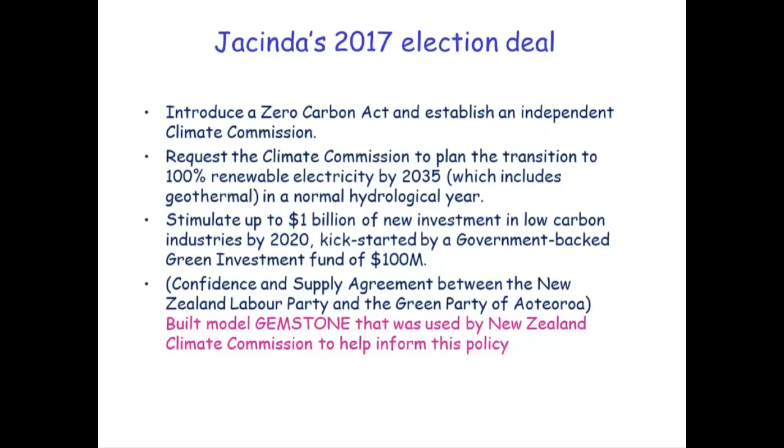This model was used by the New Zealand Climate Commission, which was created to help inform policy. I'd like to tell you briefly three things that come out of that discussion and use of the model. The first is that policies really do matter. If you look at these figures, all of the figures I'll produce today go on the bottom axis, from 0 or business as usual over to very aggressive reductions.

The policies for those reductions could be a reduction in CO2 emissions, shown as green bars in these figures on the left, or they could be a different policy about closing down plants, shown as blue lines. As you can see, the green figures show our model worked: if we pursued the policy of reducing CO2 emissions, we could do that, and the green figures actually decrease down towards 0, whereas the cost increases as you do these things.

However, if you change the policy to just say we're going to shut down non-renewable plants, then because of the definitions that economists, policymakers, and politicians make, the net effects on CO2 reductions are less than idealized compared to the CO2 reduction policy.

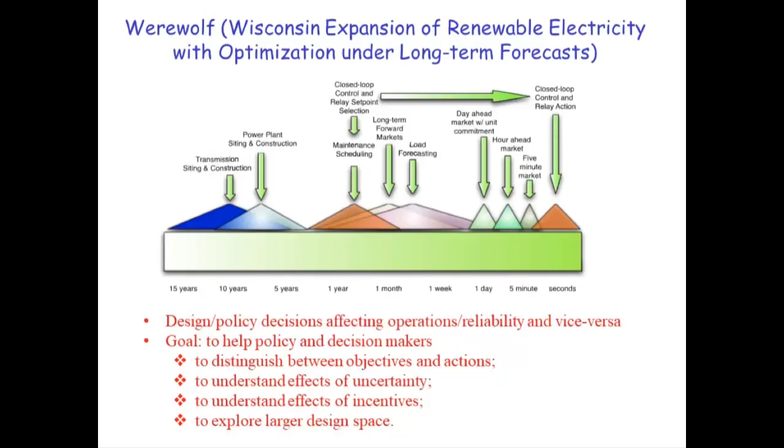We have to worry about a whole bunch of different futures and uncertainties to explore. Our model enables us to explore a much larger design space than normal operational models, which typically just tell you what the investments are at particular stages. Our model enables us to do much more than that.

Renewable energy makes those uncertainties much more difficult and challenging. Not only are the uncertainties those policy or climate style uncertainties that are determined by long scale planning, prices, electricity prices, or long-term effects, but they're also affected by operational effects, both of weather and demand, and also the notion of the duck curve, which shows an increasing need for ramping at different times of day, and because of renewable electricity, a much higher need for backup capacity to ensure batteries, to ensure supply when we have random renewable generation.

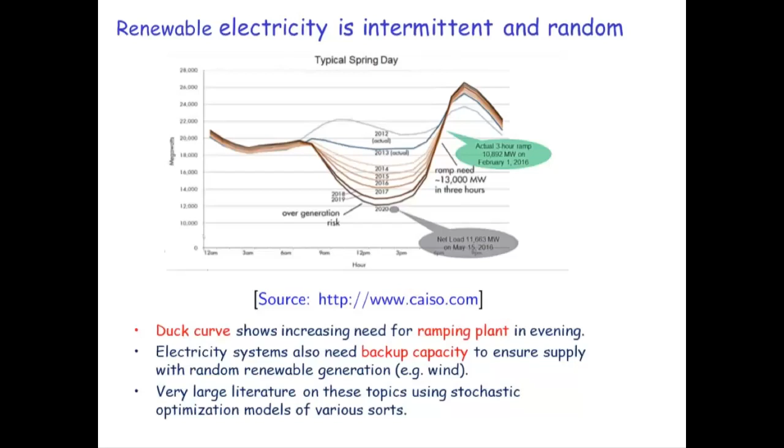In this context, what we build is a model that enables that trade-off between those long-term capacity decisions. In this simplified two-stage stochastic model, for all of the nerds amongst you, we talk about capacity decisions, which are long-term decisions, and I'm thinking of those as variable Z at cost K of Z, and those affect those short-term operating decisions, which are in this simplified model, generation Y, cost C of Y, and the effects of the uncertainties, which might require load shedding at a cost of Q, at a cost of V of Q.

What I mean by uncertainties is we have both uncertainties in terms of the types of investment that we can actually do and the development of different technologies and their capabilities. So different futures correspond to different views of those technologies, but they also encapsulate the different uncertainties which are due to demand or due to prices or even due to intermittent wind and weather effects. And so our model is this two-stage problem, which invests in capacity of type Z, of size Z, and then operates both at Y and Q.

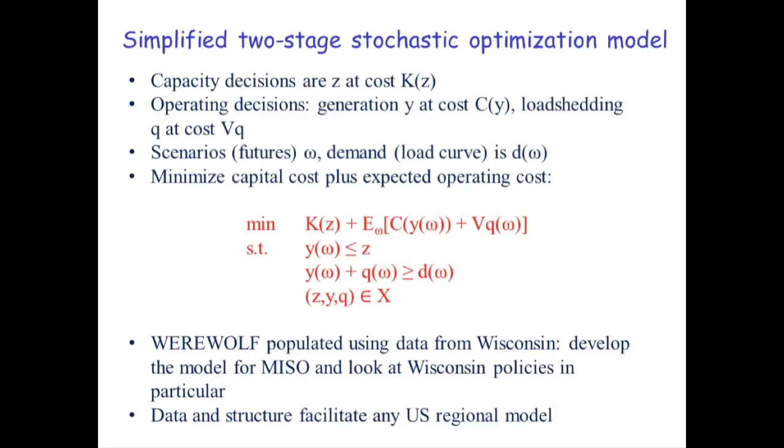The data in this model is very rich. We take data from a whole bunch of different systems, both from the EPA, from NREL, and ReEDS data, and the annual technology baseline, as well as using data from a whole bunch of census data. And so we build models, and I show you some indication of these models. The data that we generate is at the county scale in Wisconsin, but it can be formulated across any regional area across the United States.

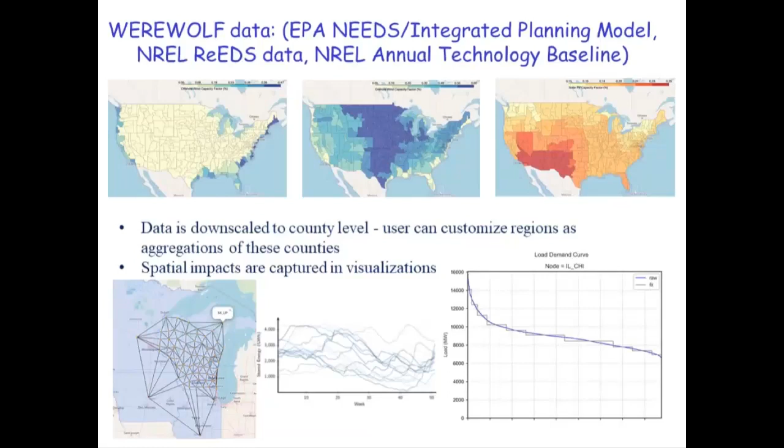I show the types of data that we have here for offshore wind, onshore wind, and solar generation. Those can then be downscaled first to county level, and then the user can customize regions within the model, such as Wisconsin, to generate aggregations of these counties to inform our models with this particular data. We actually have different types of data on transmission, shown in the bottom left here. In the middle, we have all of our different scenarios in wind or solar. And then we actually have physical constraints, which are load demand curves, which are also scenario dependent, and I give you some, but also spatially dependent. So we actually have an Illinois-Chicago load demand curve, even though the model itself is being postulated for questions within Wisconsin.

So I don't want to go into much detail, I probably don't have a lot of time anyway. But we do talk about carbon reductions, and within Wisconsin, we see a very different portfolio of technologies that are relevant for the policymakers. The policymakers can see graphs which tell you at each different level of carbon reduction, what would be the portfolio of different techniques or different installations of generation capability. And the graph on the right shows to the people making policies the effects, the shutdowns, or the reductions in usage of different generation technologies due to the imposition of a policy, which in this case is carbon reduction.

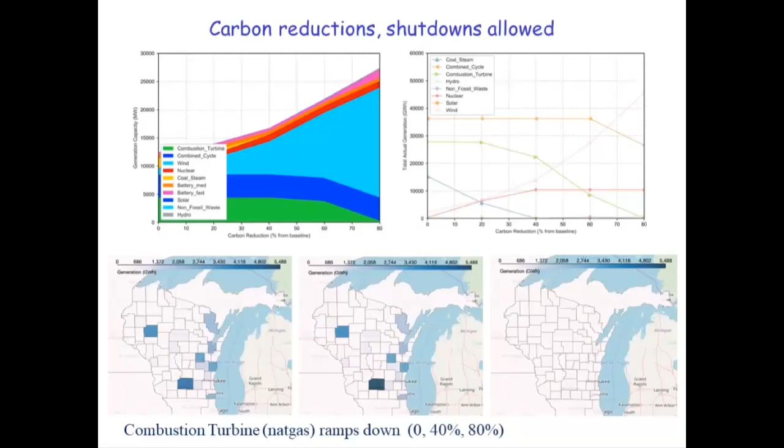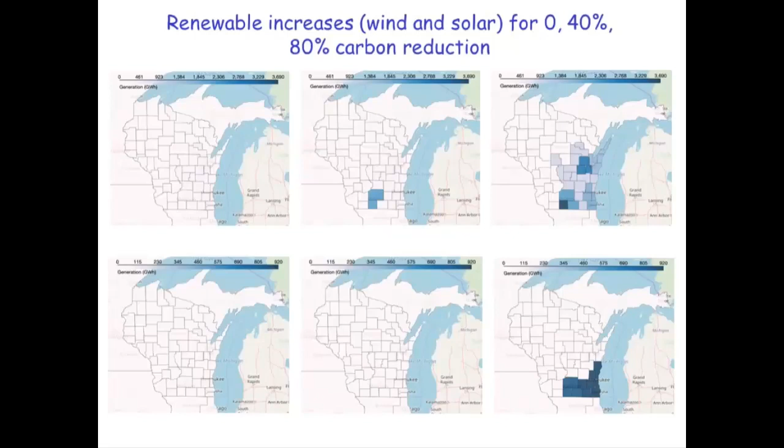I want to challenge everybody, or invite everybody here. I saw there a question, let me just finish off here, and then I'll come to the question at the end.

We presented these models to legislatures and utility owners and the Wisconsin Public Utility Institute, and tried to inform them that our models can help inform policy, and that our models show how effects and the costs of constraints will change policies, or should enable people to talk about different types of policy and how to impose or get to objectives with different techniques or different engineering aspects.

Our models couple both reliability in the operational level, via a large number of scenarios, to the investment decisions that people are making. The model is currently being refined to enable these people, both in the legislature and in utilities, both public and private within Wisconsin, to actually utilize their data, their private data, in conjunction with our models, so that everybody within the policy debate within Wisconsin is able to use the same model, but inform it with sometimes proprietary data that is only available to certain of the decision makers.

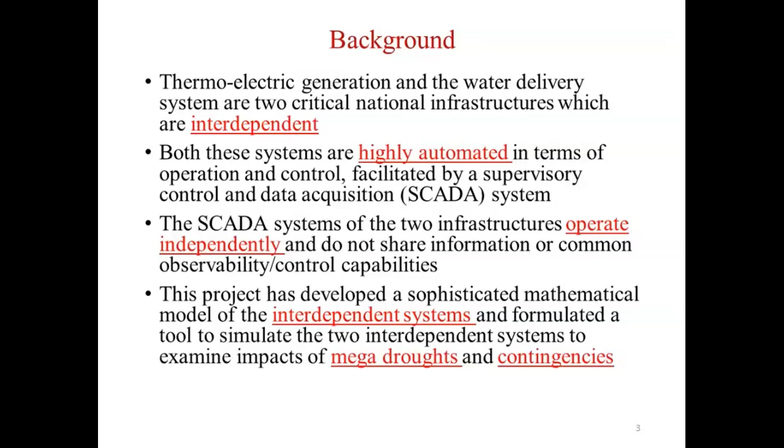So in this project, we were going to build a sophisticated model of the interdependent systems and formulate a tool to simulate the two systems, taking into account this interdependency. The idea here, in the Southwest, the primary interest was to examine the impact of mega droughts and contingencies on these two systems. So we did quite a bit of surveying of water system engineers, electric power system engineers, and talked to a number of experts in this area.

The water delivery system, for people who know about the power system, has several commonalities. There are typically large sources of water. You use a lot of pumps to actually deliver them close to large urban areas. You have some storage in these areas, and then you treat this water.

In Arizona, there is the Central Arizona Project, which is a large canal system that brings water from the Colorado River towards the primary urban areas of Phoenix and Tucson. Closer to these cities, you have a system which looks very similar to the electricity distribution system, with a series of pipes of different diameters, pumps, and storage, which supply houses with water, or agricultural farms with water in this particular case.

The major difference between the water delivery system and the electricity delivery system is storage. They have a significant amount of storage. They can store water at heads in these water towers which you see, and then use them for delivering to the system. So that's one commonality.

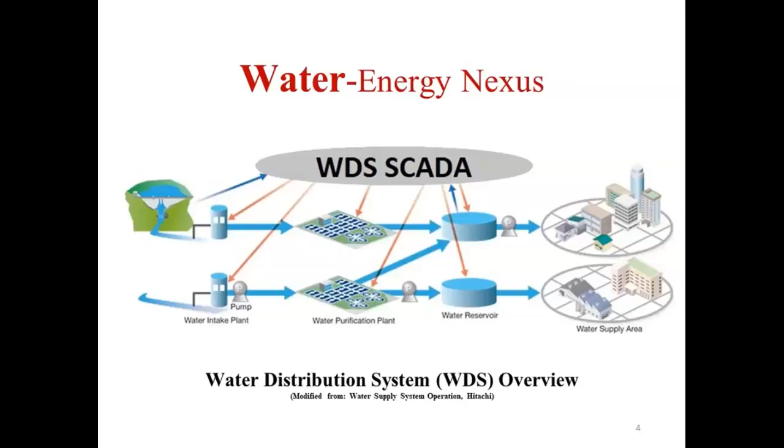The primary interdependency comes with thermoelectric generation. This is not the water supply in the boilers - that's a closed system requiring very little top-off. The primary use of water is in cooling, and when they do wet cooling using condensers, there's a spray of water on these condenser tubes, and a large part of that water actually evaporates. That's where the loss occurs.

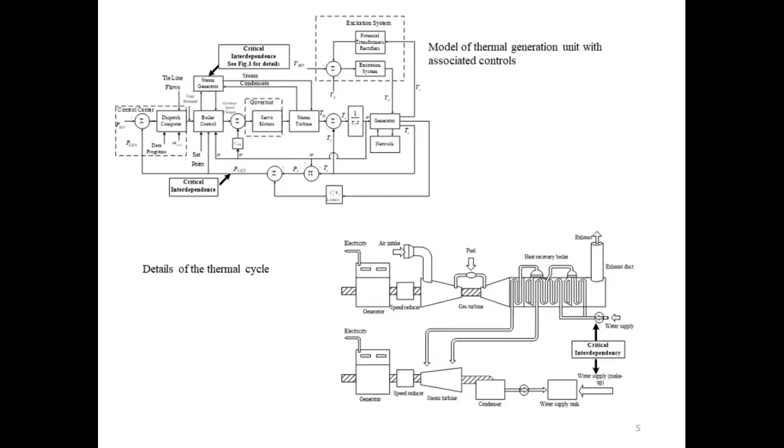There are some very fascinating numbers if you see what happens around the country. So that is one dependency with the power system.

In the water delivery system, starting from the raw source of water all the way up to delivery and treatment, they have a huge number of pumps, stirrers, and various filtration facilities which again require pumping, and they are a huge consumer of electricity.

If you look at the numbers, there are some significant shocking numbers in terms of electricity that they use. Both power plant operators and water system operators have very good knowledge of the cooling water requirement - power plant operators know exactly how much water they will use in gallons per minute for a particular level of generation. Water system planners and operators know what their pump demands will be. Just like in the electricity system we commit and schedule generators, they actually commit and schedule pumps. So there's a very similar operation taking place.

And just like we do day-ahead scheduling, they too do day-ahead scheduling. It so happens that their scheduling horizon is 1 hour, just like we have the scheduling horizon in the power system to be 1 hour. So these are all various commonalities that we see.

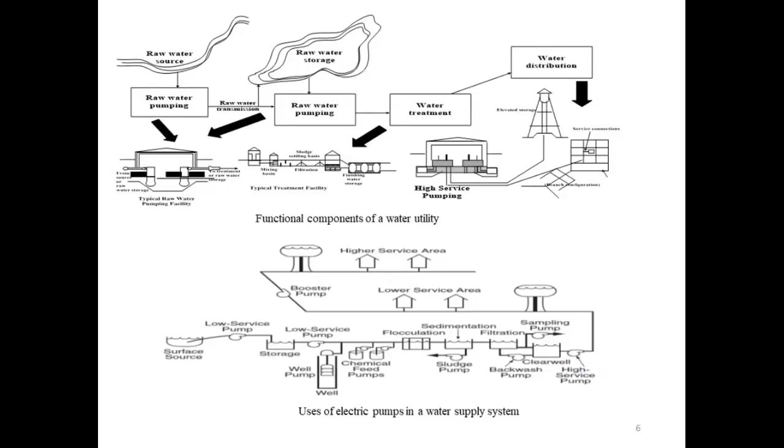Here is an idea of some things around Arizona, just as an example, but I'm sure this is common elsewhere in the country too. We have this canal system which is operated by opening and closing gates, which are electrically operated. And then we have large pumping stations, and these pumps are heavy electricity loads.

For example, this is a pumping station near Tucson. It has 6 units, delivers about 621 cubic feet per second, and has a total pump capability of about 8,100 horsepower - roughly a 6.04 megawatt load. So it's a fairly significant load, and this is where the primary interdependency with the electric delivery system comes about.

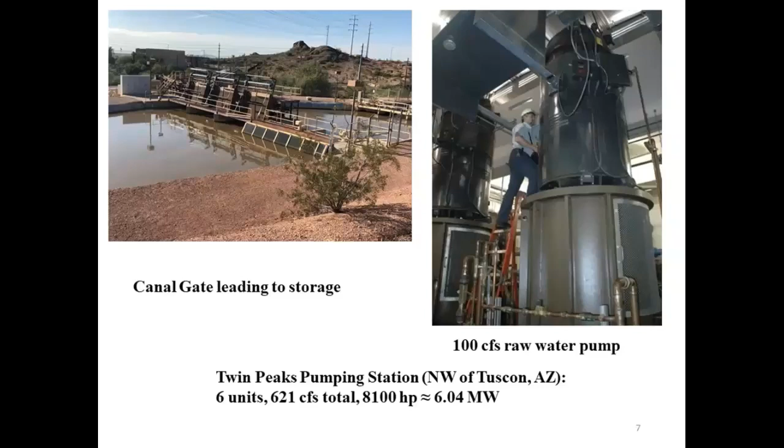If you take a state like California, which grows a large amount of fruit and vegetables for the nation, some 15% of the electricity usage in California primarily goes towards pumping needs for irrigation. That's another shocking number, because that's where you can see the big interdependency coming between these two systems.

In our survey, we saw that electric utilities keep meticulous records of cooling water usage. They know how much water is required for different types of thermal prime mover fuel types, and they have this data for different times of the year and different times of the day. They calculate this in terms of an average cooling water requirement rate in gallons per megawatt hour.

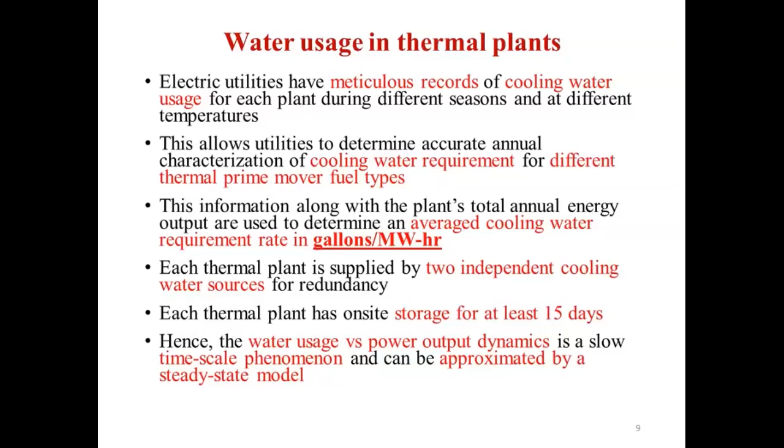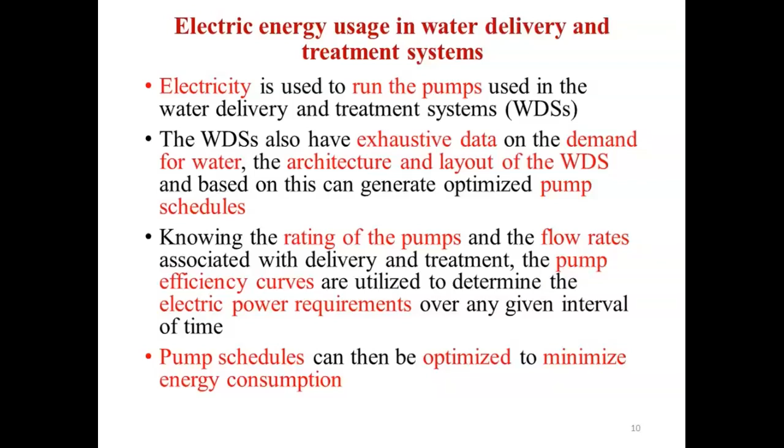The water system again uses electricity to run pumps, and they too have exhaustive data on the demand for water, the architecture and layout of their water delivery system, and they use this to generate optimized pump schedules. They know the rating of these pumps, the flow rates and the pump efficiency curves, so they can also calculate the electric power requirements. So the pump schedules can be optimized to minimize energy consumption. That is what their scheduling and commitment is based on.

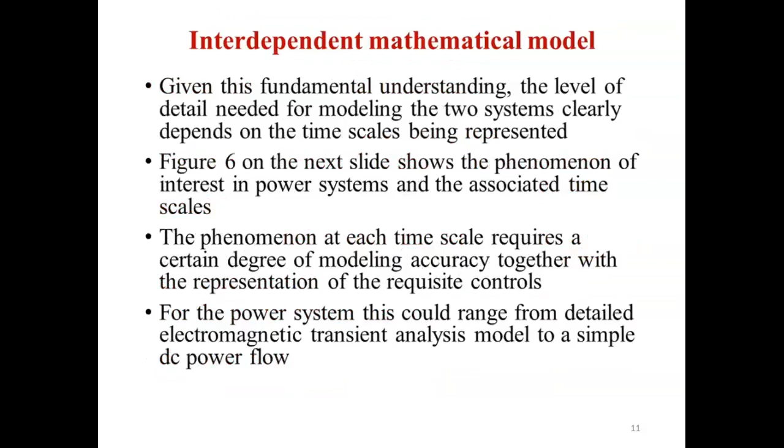Given this understanding that we developed by conducting large surveys, talking to people in both Phoenix and Tempe and other cities, and talking to the water utility and the electricity utilities in the state, we came up with the understanding that the type of analysis or modeling we would require is in the time scales of just time series power flow and unit commitment. So this one hour schedule really worked for us very well. Since that was the operating horizon for both the water system and the electricity system, we did away with the fast dynamics and could capture everything with a series of static power flows on the electricity system, and then did appropriate optimized unit commitment on the generating units with anticipated operating horizon in the short term.

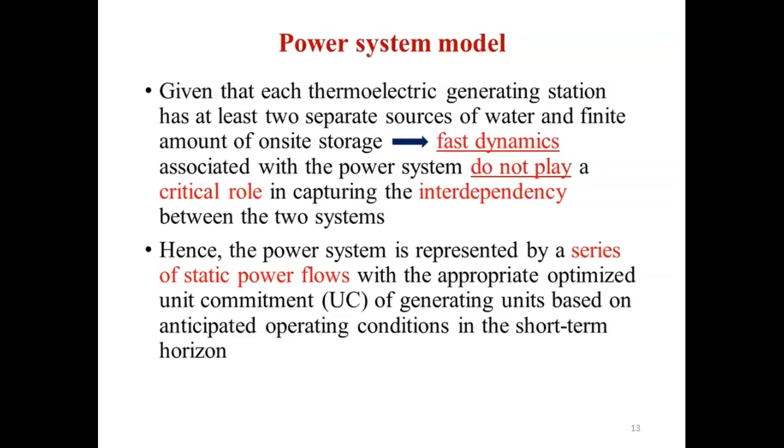We basically did an economic dispatch, but in the economic dispatch too, we specifically modeled the pump loads as a separate load by itself because we kept track of it during every hour. And then we also put a cost on water, the operational water cost to account for water usage, very similar to what one would do in an environmental dispatch.

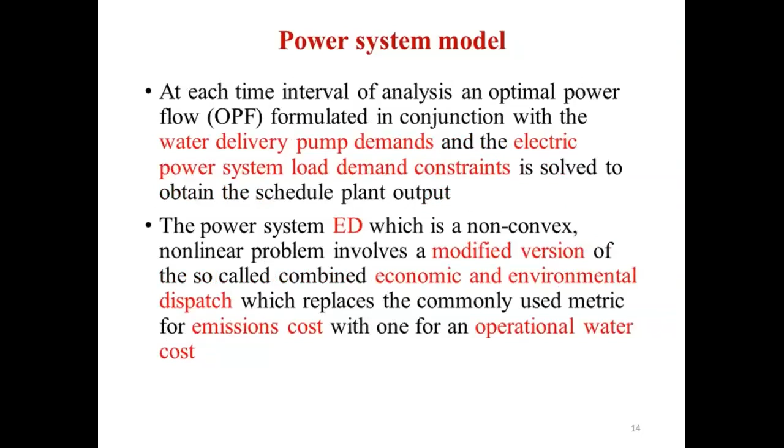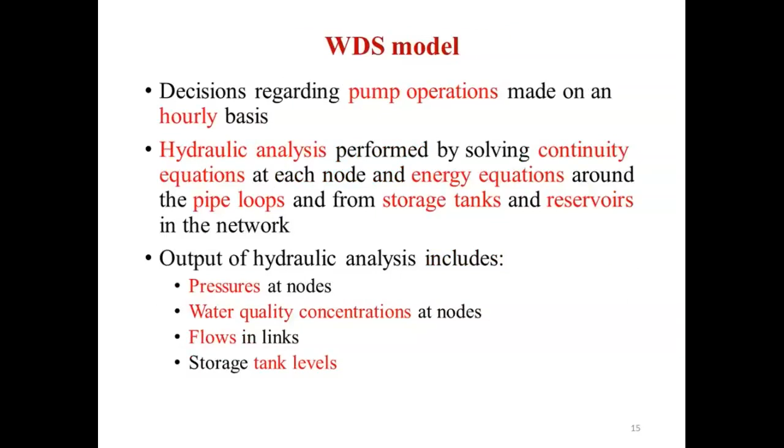In the water delivery system, they do very similar things like we do. They model continuity equations at each node, energy equations around pipe loops, and from storage tanks and reservoirs in the network. So they look at pressures at nodes, water quality concentration at nodes, flows in links, and storage tank levels. For this, they have a very nice piece of software developed by EPA called EPANET. So we did use this software in our modeling.

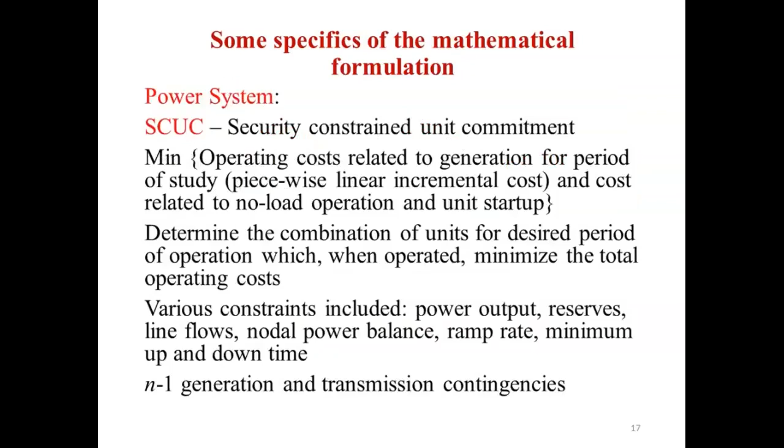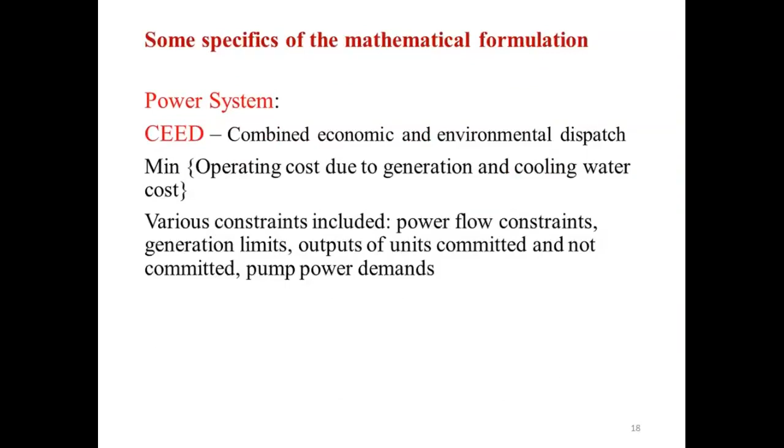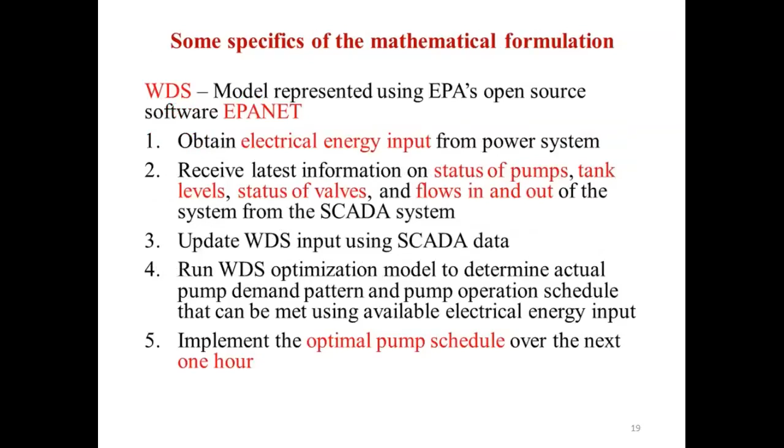So this is the basic setup. We basically solve a security constrained unit commitment for the power system, and then we do a combined economic and environmental dispatch, where we include constraints like power flow constraints, generation limits, outputs of units committed and not committed, and pump power demands. We specifically incorporate that into our economic dispatch. Then on the water side, we run their model on EPANET, and this gives an optimal pump schedule over the next hour.

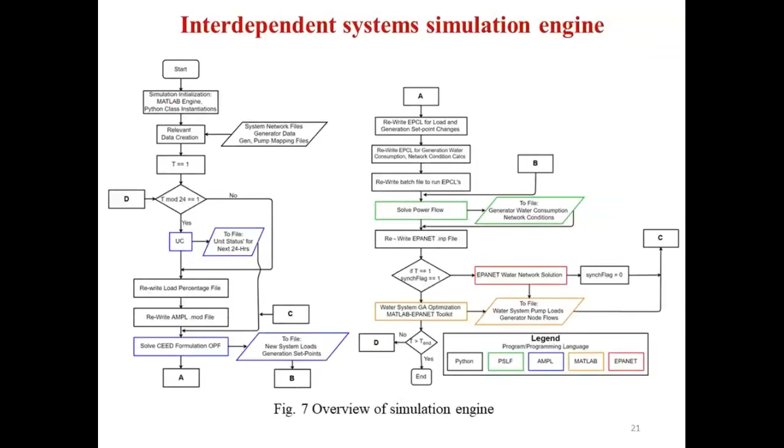So we have done this. We have looked at all the constraints that we use, and then we have built up a very detailed model, and an interdependent simulation engine. On the power side, we use a commercial program called PSLF, and on the water side, we use EPANET. This is like an eye chart, but it just shows what we do. I won't give you all the details. Instead, I'll give you some references which show what we do.

This is basically how the system works. We have an inter-networked program control using Python. We do the power system optimization using AMPL. We do the simulations on hourly snapshots using PSLF, and then we use EPANET similarly in the water delivery system.

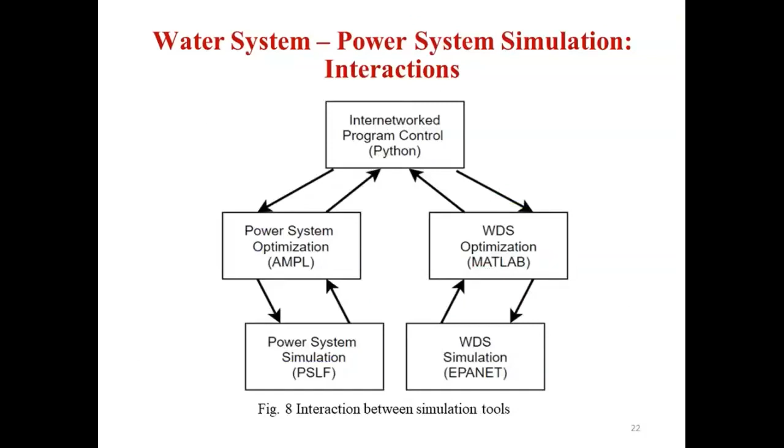So basically what we have shown is that by doing this interdependent modeling, we can model both electric and water delivery systems. They provide new insights into the impacts of disruptions on the two systems. We have considered several cases of severe droughts, and we have developed a new method by which we can show what you have to do to manage this water shortage. Basically, it will put a limit on the maximum generation that you can get out of a thermoelectric plant.

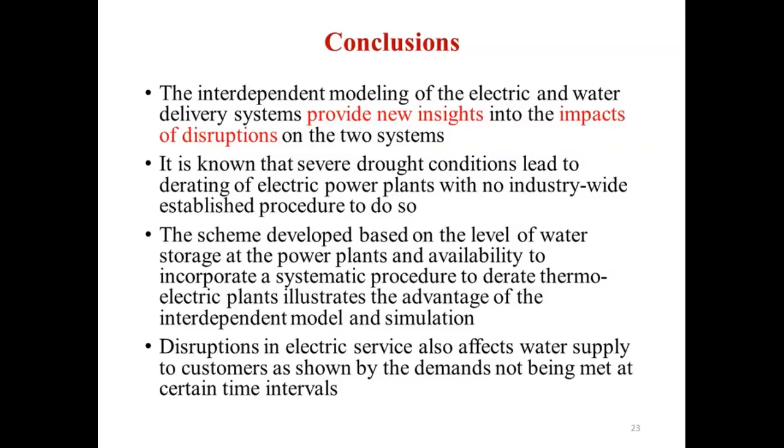So I'll stop here and open up for questions. Great, thanks, Vijay. We did have one question that came through privately to the ESIG account, so I'll read that to you.

It says, with 1.5 million acre feet per year allotment coming through the CAP from the Colorado, and roughly 1 terawatt hour per year consumption, is there much flexibility in the pumping, or are the CAP pumps running near 8760 hours? There is some flexibility in pumping because the CAP has intermediate storage along the canal system. So depending on, they have to supply some amount of water for irrigation, some amount for the cities, and then SRP is the primary water utility in the state. SRP manages all the supply from the Central Arizona Project to the various cities in Arizona. So that's how this takes place. So there is some flexibility. The pumping is not 8760.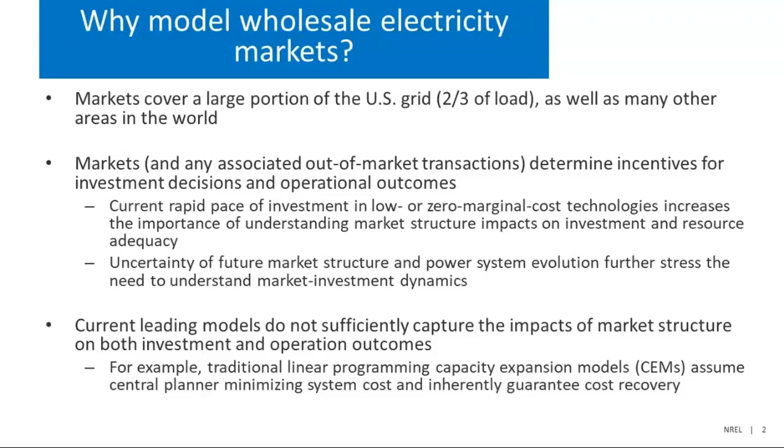So what are we doing at NREL to address this?

We're working on building a new model that captures the impact of market design as well as heterogeneous investors on investment decisions and in turn how that impacts reliability. And when I say reliability here, I'm referring mostly to resource adequacy and load balancing at operational timescales. So this new tool we're calling the Electricity Markets and Investment Suite. I'll mention here a little later that the suite part of this, the S in EMIS, refers to the fact that we have three different model formulations that we're developing.

Within this model, we want to represent individual investor firms who have different beliefs about the future and different risk representations. We want to be able to explore how different market designs perform under uncertainty and imperfect information. And related to this, we want to show how imperfect information can result in non-optimal investment, which gets back to the point I made on the previous slide about potential over or underbuilding.

Because we have these different firms, and in this structure we want to capture the linkages with operations, markets, and investments, this requires a fundamentally different approach mathematically speaking. This touches on a lot of the things that Michael Ferris presented on, and it's a much more difficult approach than what we traditionally do with those linear programming capacity expansion models. That's what's resulted in the three different formulations we have, which I'll talk about during the second half of my talk.

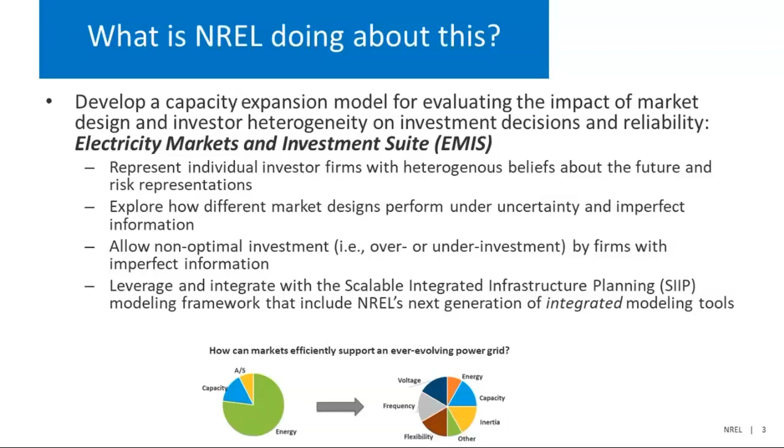We put a lot of effort into this, and we have to do it this way because these tools are inherently siloed. They have different modeling, or they're built in different modeling languages. They have different data sets that they're drawing from, so it's just a lot harder to have that interoperability.

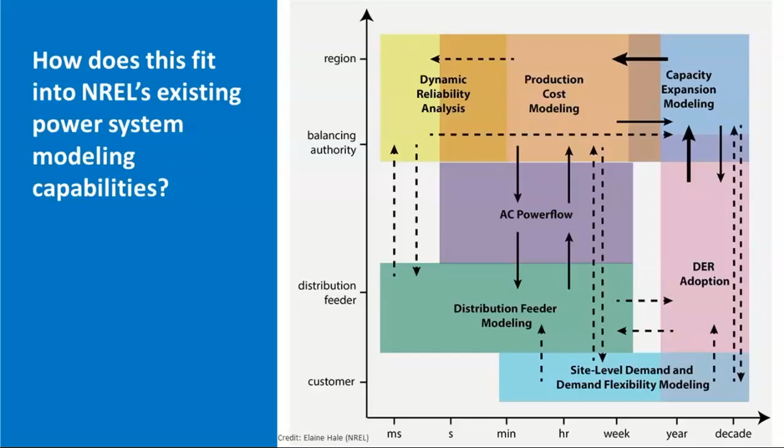I bring this up really because it's important to note that because we plan to integrate within this broader framework, the extent to which SIIP has additional capabilities and better representation of all of these features, the more that we're able to access with EMIS to be able to broaden the sets of research questions that we can tackle.

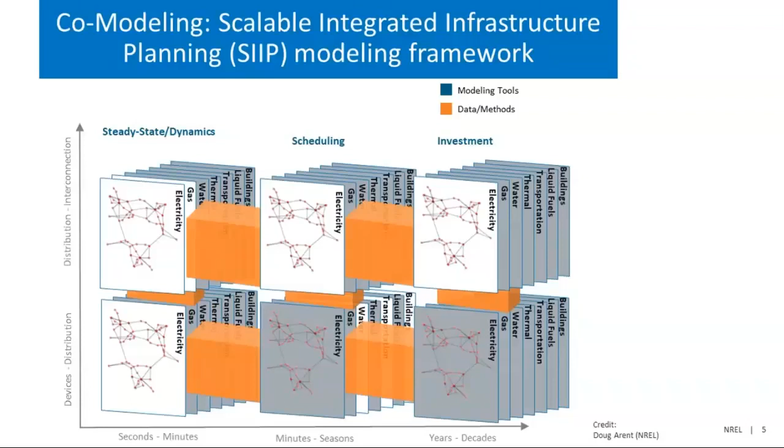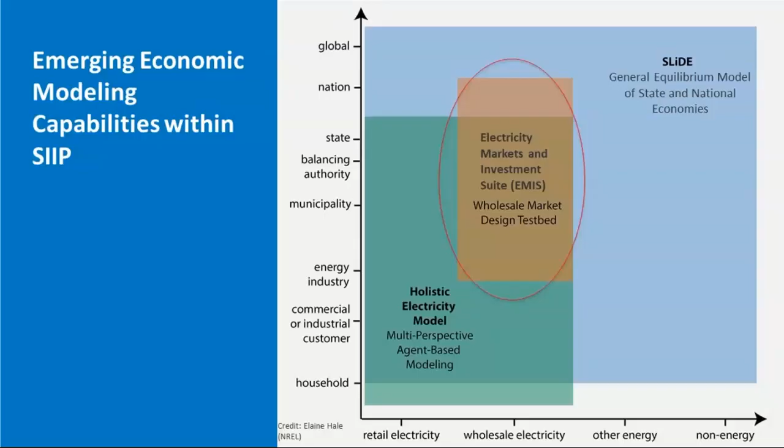We also want to represent multiple project build phases, for example an interconnection queue phase, and the costs and time lags involved with each of those, as well as economic policy and other scenarios that account for uncertainty. You could even have market design changes themselves, or other cost or price trajectories that you want to play around with.

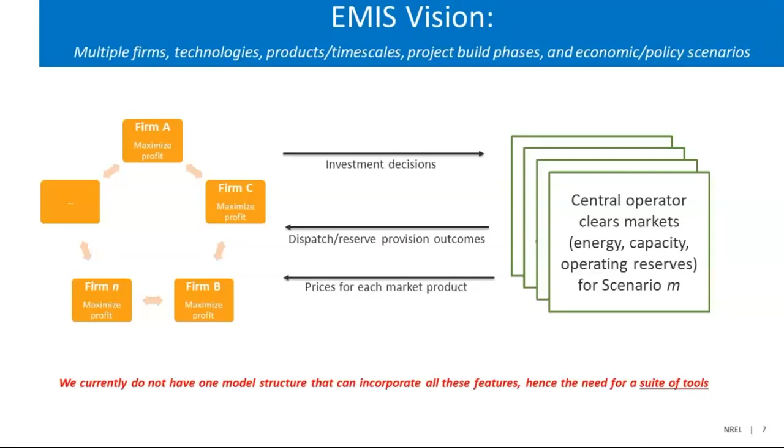However, as I mentioned before, because this requires a fundamentally different approach than we've historically taken, we have to have three different modeling formulations. The ideal case, which I'll talk about next, was not mathematically tractable for us. So I'm going to talk through these three cases now. You can think of them as tracks or as tools.

If you're familiar with complementarity modeling, this is an EPEC, an equilibrium problem with equilibrium constraints. In our case, this was not mathematically tractable, so in its place we have two different versions that are approximations of this. Sorry, I misspoke earlier - the third point in this track is not the exact strategic equilibrium, it's the approximate strategic equilibrium. The other element is the agent-based simulation. So to summarize, the first item is perfect competition on the far left, and the second and third are approximation approaches, sort of in the middle and to the right of this spectrum.

I'm going to talk through each of these individually at a very high level, because we don't have time to go into the details. The first formulation is the idealized competitive equilibrium, or perfect competition.

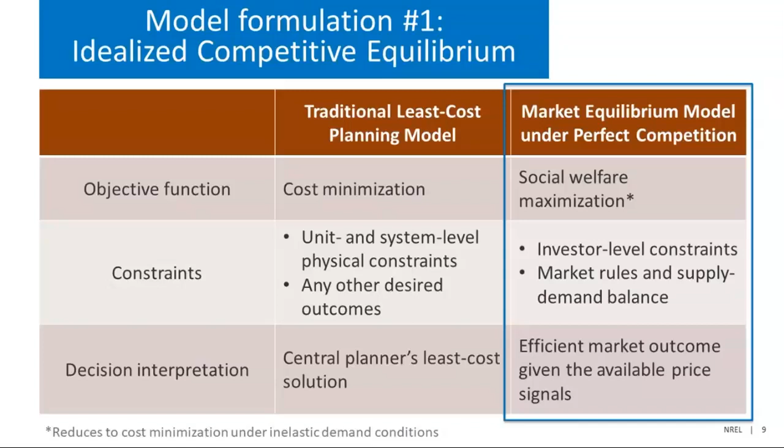We move to the second formulation, which is what we're calling an agent-based simulation. I'm going to talk through each of these firms separately, but the overall idea is that you have multiple firms who are independently making, and in parallel, investment decisions without any knowledge of what the other firms are doing. Then they're interacting once those final decisions are made with the actual wholesale market clearing process. So this is somewhat of an iterative, stepping-forward-in-time process.

Based on those price projections, the firms will decide to build and also retire existing units — they'll build if the NPV is positive, they'll retire if the NPV is negative. Each firm, again, is doing that separately, and they each have separate beliefs about what the future holds. In our case, as a starting point, we're focusing on different beliefs about what the load growth will be.

Once they make those final decisions for their portfolio, they submit bids to the market for all of the products that exist separately, and then the market clears. Then when those real outcomes are seen by the firms, they can see how well or not well their beliefs about the future and the resulting investment decisions lined up with their realized market outcomes.

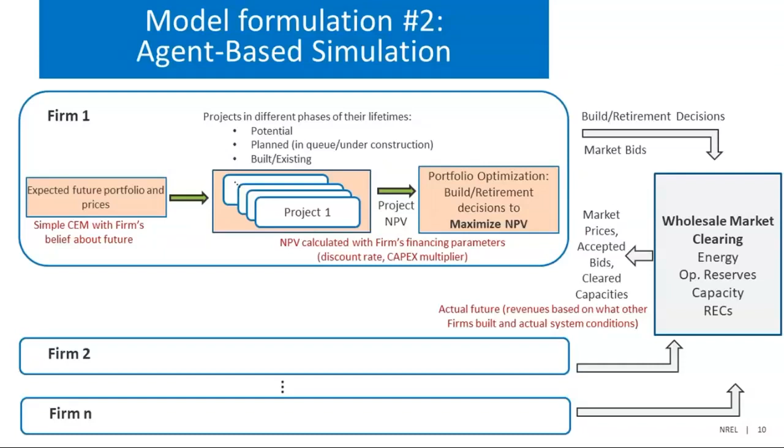I also note that we do hope to add some sort of Monte Carlo approach, where we have different price projections to be able to account for uncertainty in the prices themselves.

So the last model formulation, and then I'll wrap up, is what we're calling our approximate strategic equilibrium. This is using a surrogate modeling approach where we approximate that ideal strategic equilibrium problem.

There are three main steps to this. First, we simulate the market clearing for many different system build-outs, looking at lots of different portfolios and what the profit outcomes would be associated with each of those. The second step is we use machine learning techniques to derive a set of surrogate functions that link those investment decisions with the resulting profit.

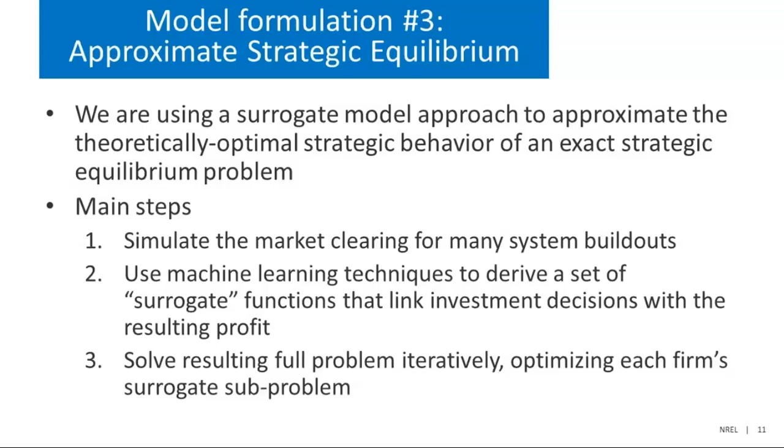The third step is that we solve the resulting full problem iteratively, where we optimize each firm's subproblem — in this case, the surrogate subproblem — separately until they converge onto the final result. So I'm going to stop there.

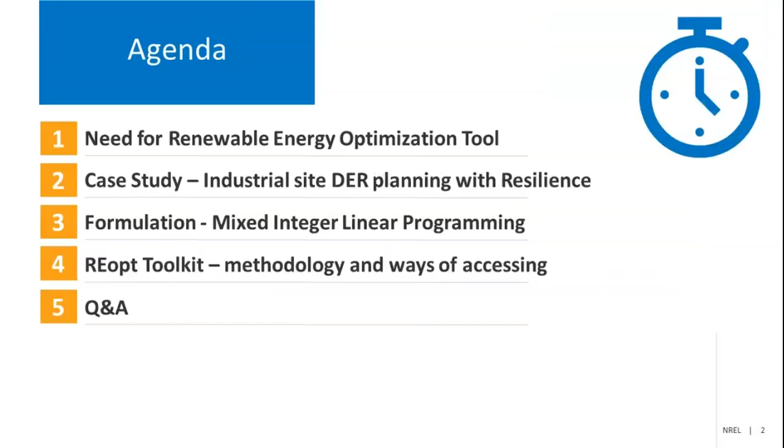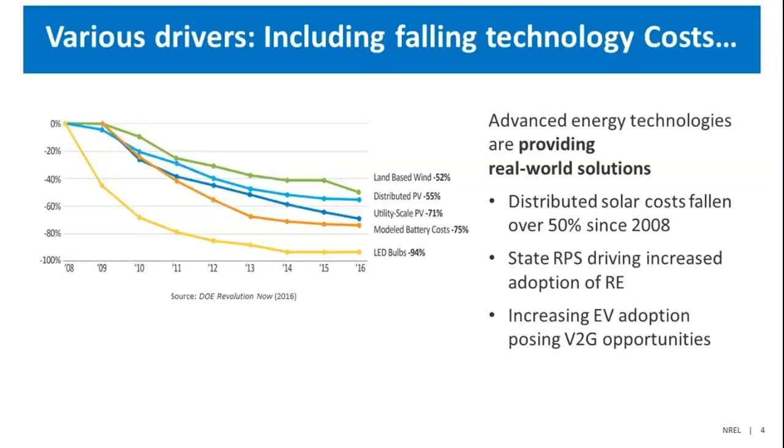So why renewable energy optimization? I think the answer is pretty clear that there are various drivers, including falling cost and state RPS requirements, and this new area of electrification of the transportation field. With these drivers, adoption has been increasing, and worldwide 25% of the power is currently coming from renewable energy, but it is projected that it should reach around 85% to avoid worst impacts of climate change.

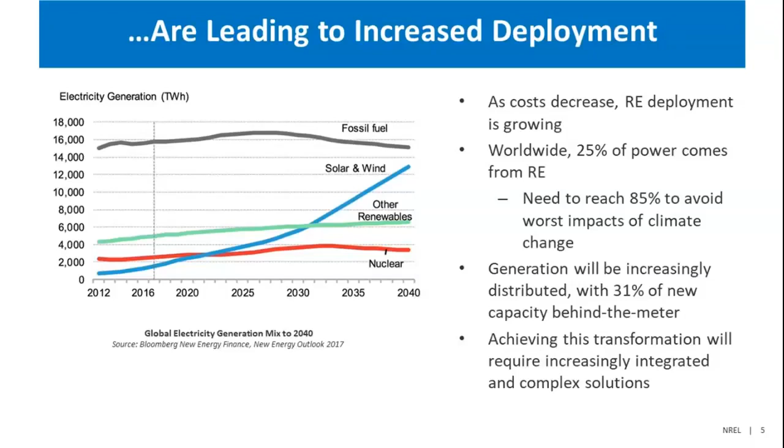And among that 85% of renewable energy, about 31% is projected to be distributed energy resources, behind the meter installations. For achieving such a transformational level of installations and deployment of DERs, there are complex analyses which need to be done, where we answer questions like: given this utility tariff, this load profile, does it make sense to deploy a PV or a battery system onto my house? And then if we couple the resilience aspect into that analysis, that I want my system to be resilient enough to stay on for 40 hours if an outage were to happen, then how do the technical as well as economic factors play out within that complex analysis?

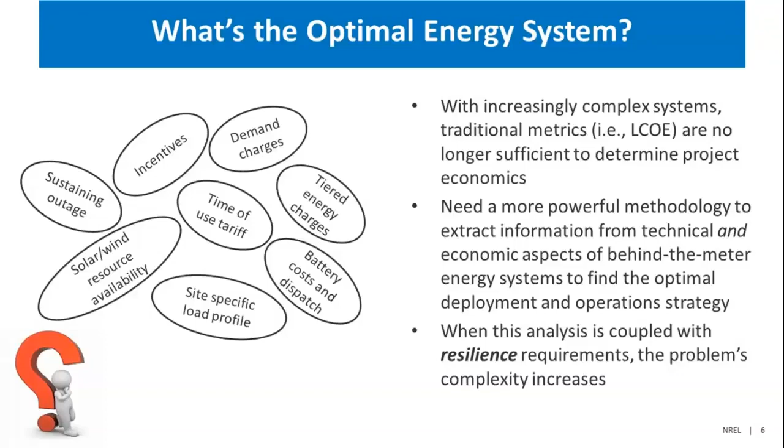So that's the question we set out to answer using the REopt Lite tool. This case study demonstrates one such example, answering the question of determining the optimal DER size with the capability to sustain a predefined outage. Here we choose a mass manufacturing plant in the Denver area with a given yearly energy consumption.

And then it has an existing PV system onto it, which is about 500 kilowatts, and we want to assess DER options, which is additional PV as well as battery. The analysis focus is resilience, and we are predefining the outage as a 48-hour long outage, but still the objective of the analysis is cost minimization, keeping the resilience constraint as priority. The critical load is defined as 65% of the total load, which needs to be on once the grid outage happens.

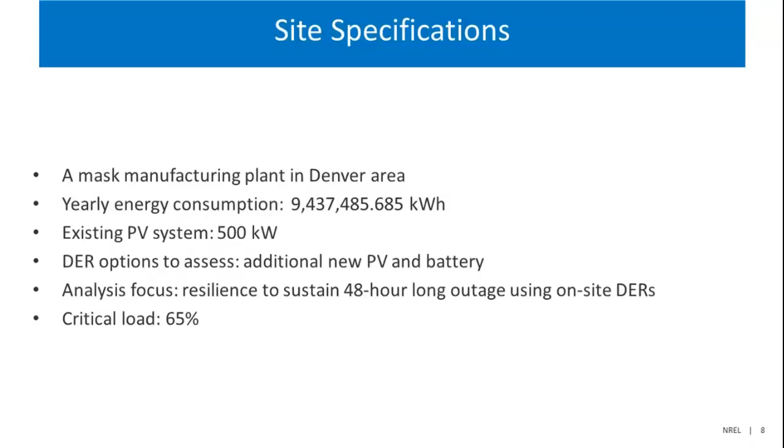So this is how the load profile looks like for the manufacturing plant. It's weekday and weekend almost the same, and peaking around 4 a.m. when the machines power up and they draw the maximum amount of current for motors to start, and pretty much same throughout the week as well as months.

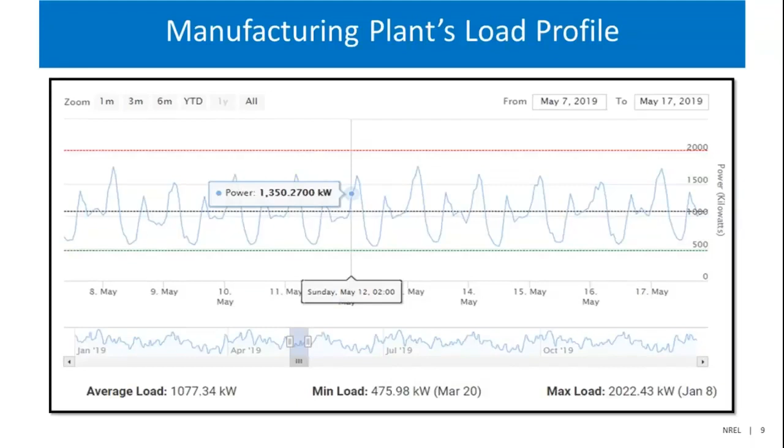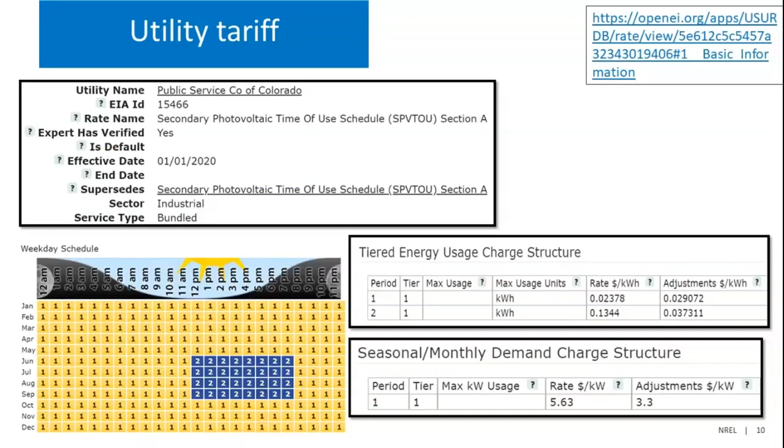The utility tariff which was used was from Public Service Company of Colorado, called the Secondary Photovoltaic Time of Use Schedule tariff, and it has energy as well as demand charges, and the rates as well as the adjustments get added as the actual rate which is being considered. There is a link to the page where this utility tariff data comes from.

But one thing to note here is that this method does not incorporate value of lost load. And if we were to incorporate that value, this number will surely go down and may become positive, depending on the case.

So this table shows the results from resilience versus financial focus. As I was explaining earlier, when it is resilience focused, though the objective is still cost minimization, the constraint of resilience that the system should be resilient enough to meet 48 hours of outage gets superimposed, and that causes the system sizing of PV and battery to go high versus the right side column. In financial, if it were to be a purely financial analysis, meaning still considering the technical components and aspects but not imposing resilience constraints, then it doesn't make sense to install PV and battery for the site.

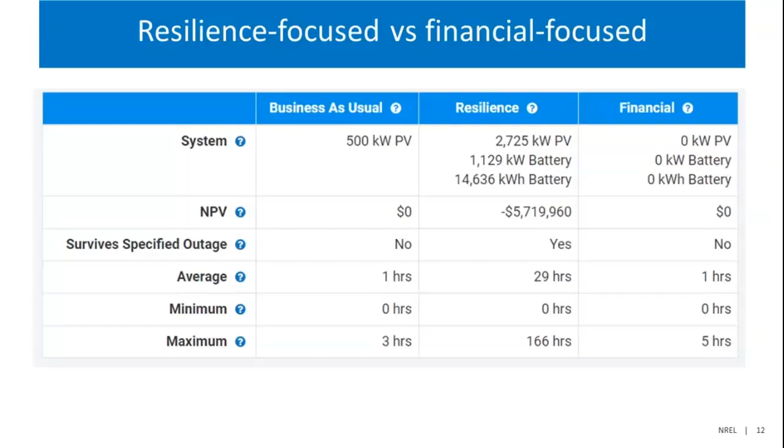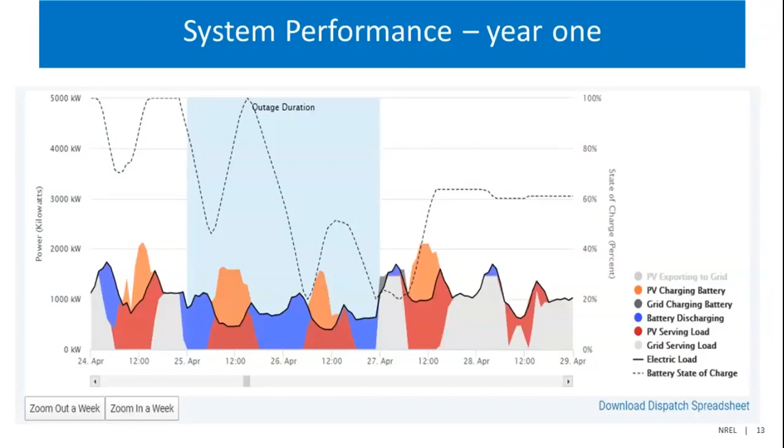This plot shows the system performance in year one, and the light blue box shows the outage duration when PV is serving the load as well as charging the battery, which gets discharged and again charged by PV. So the combination of PV and battery is able to meet 48 hours of outage duration and 65% of the load, which is the critical load percentage specified.

The next slide here is showing the outage simulation. So the architecture of the REopt Lite tool is such that the first module is about optimization, where a predefined outage is given as input to design the system. And once the system is designed and PV and battery size has been recommended, the second module does the outage simulation.

It's a simulation-based module which runs on a load-following rule-based strategy to understand that if the outage were not the fixed one specified as input, and if we randomly simulated outages throughout the year, starting first hour, second hour, third hour, and not fixing the length of the outage, instead looking at if the outage were to start at the 18th hour of the year, given 8,760 hours, then how long will the system recommended by the optimization module be able to sustain the outage?

So in this plot, on the left side, the tab we are looking at is the monthly tab, where the results are aggregated over the month to find the probability of system survival if the outage were to start in the month of January, for example.

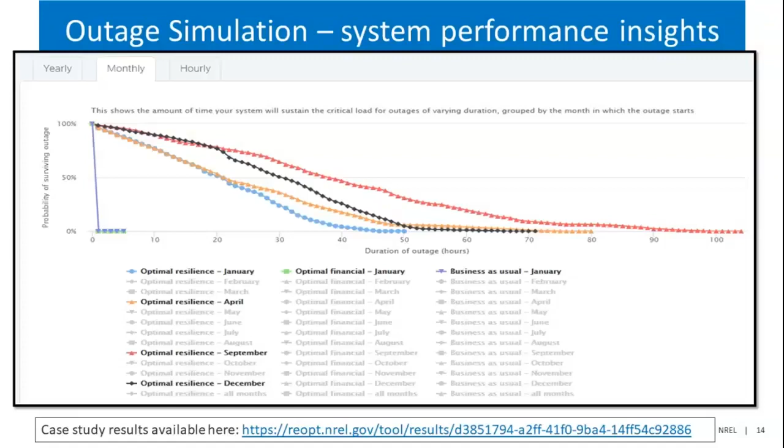A quick highlight on the optimization formulation used for REopt Lite, which is MILP, with optimization of life cycle cost minimization. It uses one year of resource and cost data with present worth factors to account for lifetime costs, which can be a 20 or 25-year analysis period.

It assumes the first year repeats with degradation and escalation factors incorporated. It can do hourly as well as sub-hourly analysis. The example we saw was for hourly analysis, and it makes sure the load is met from some combination of grid purchases, on-site generation, or discharge from battery storage. When there is an outage, only on-site assets can meet the load. But at this point, it does not consider power flow or transient effects. So it's essentially a behind-the-meter energy optimization model.

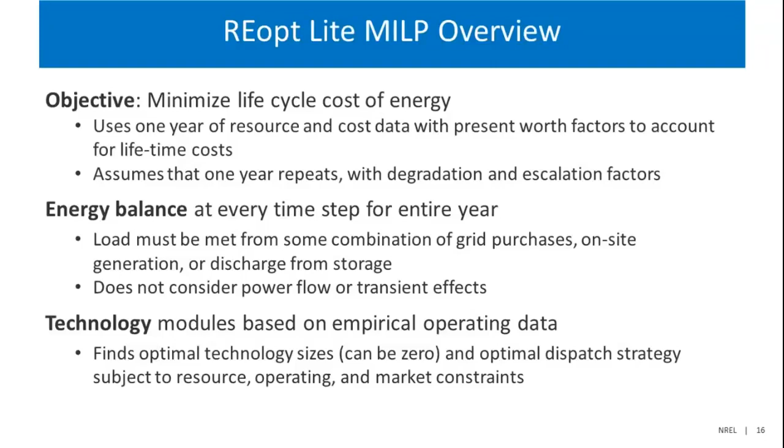Technology modules modeled within are based on empirical operating data. It finds optimal technology sizes, which can be zero. That's where the mixed integer linear programming comes in, the integer part being a 0 or 1 design choice of whether to use this technology or not. It does so subject to constraints on resource, operating, and market aspects.

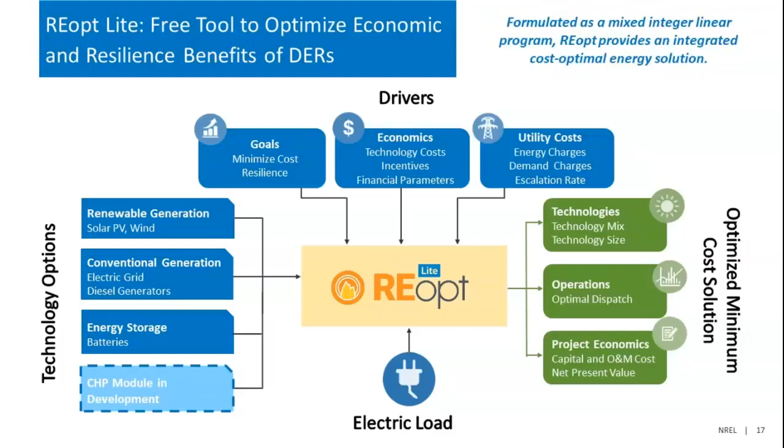Ways to work with REopt: there is a comprehensive internal model which has been around for more than a decade, and REopt Lite is a web tool which has been out for a couple of years now, since 2017. It's a web tool as well as available as an API, allowing for programmatic access, which helps with sensitivity analysis when more scenarios need to be run at the same time. The API comes in pretty handy. And REopt source code has been made open source just recently, a couple of months ago, so please do check it out if you're interested.

In summary, it's an optimization model facilitating answers to complex questions about behind-the-meter system design and dispatch, considering resilience as well. Results are driven by the economic objective of cost minimization. One thing to note is that size, technology mix, and dispatch are not user inputs. Users can constrain, for example, that maximum PV to be assessed is 500 kilowatts from 0 to 500, but the model makes this decision and recommends the size of PV that should be installed for the cost minimization objective. So users can force technology type and sizing by setting the constraints accordingly.

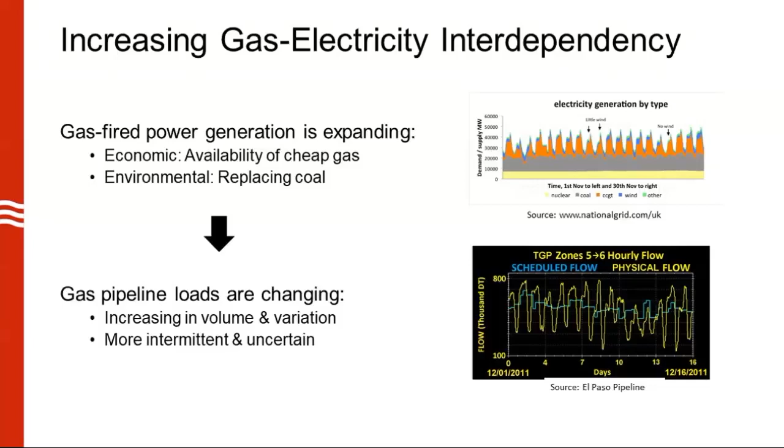But then when you look at the physical flow, you just see how much it's going up and down. And with these changes in the flow and changes in the offtakes of gas, we also get changes in the pressures. And in the natural gas system, if you get too low pressures, you end up in a situation where you have a possibility of getting an explosion. Or if you have too high pressure, you can also get explosions. And so it's just really, really dangerous. You have to be very careful how you operate this natural gas system.

So acknowledging that, our viewpoint here is how can we make sure that the electric system operators are able to take gas from the natural gas system, using it in a way that does not jeopardize the security of the gas system. Because if the security of the gas system gets jeopardized, the reality is that the first customers to be curtailed are natural gas power plants. And if the natural gas power plant loses its fuel, that can have big impacts on electric system reliability.

So currently there are several barriers to making sure that we are able to maintain this reliable supply of gas. First, there's a lack of coordination between electric system operators and natural gas system and pipeline operators. There's a need for increased information sharing, which can be challenging because there are regulatory barriers to sharing too much information. There's also questions of markets not being timed and coordinated in appropriate ways. So there's definitely a question of coordination, and also a question of operational practices.

The natural gas system and pipelines rely on compressors to pump gas through the system. The way these compressors are operated today is similar to what Vijay was mentioning about the water system, where people are dispatching pumps to pump water. Gas pipeline operators are also dispatching compressors to push gas through the system. But we are seeing that there might be different ways to utilize those compressors better, to make sure the gas is available at the point in time and space where it is needed, so we are able to withdraw the gas we need for electric system generation.

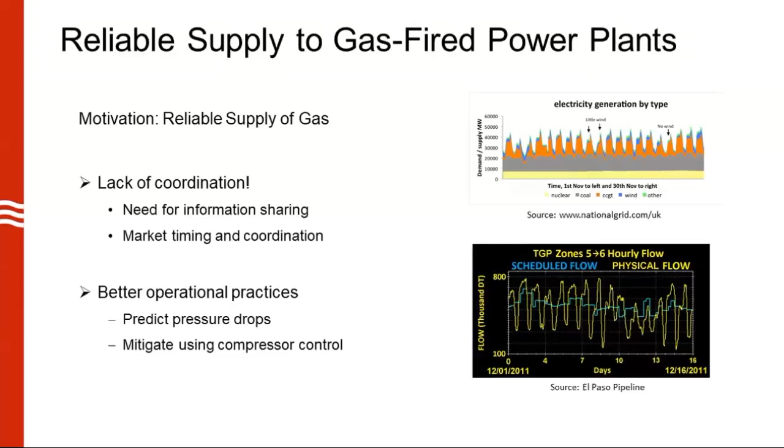I wanted to highlight a couple of differences between gas and electric systems that make it challenging to coordinate them. One key component is that the gas system actually has inherent storage in it. Essentially, the gas system stores a lot of natural gas in the pipes. In order to maintain that high pressure, there has to be a lot of gas inside the pipe. And if you have a gas pressure that is higher than what you necessarily need to be secure, you have some extra slack. You can withdraw a little bit more gas for a while than what you're putting into the system, and you will still be able to maintain safe system operations.

That means that in power grids, we have this balancing happening at the second-to-second scale, with very fast dynamics. Whereas in gas pipelines, we only need daily or monthly balancing. In power grids, storage is costly, but gas pipelines have this inherent storage.

There's also the fact that electric reliability is there for all customers. But in the gas system, the contracting with natural gas power plants is such that they are typically the first customers to be curtailed. There's also differences in how the markets are structured and the timing of the markets. And one important thing related to this question of balancing and storage is that the power grid reaches steady state in seconds, whereas a gas pipeline typically takes hours to reach steady state. We could argue that in an operational time frame, the gas pipeline essentially never reaches steady state.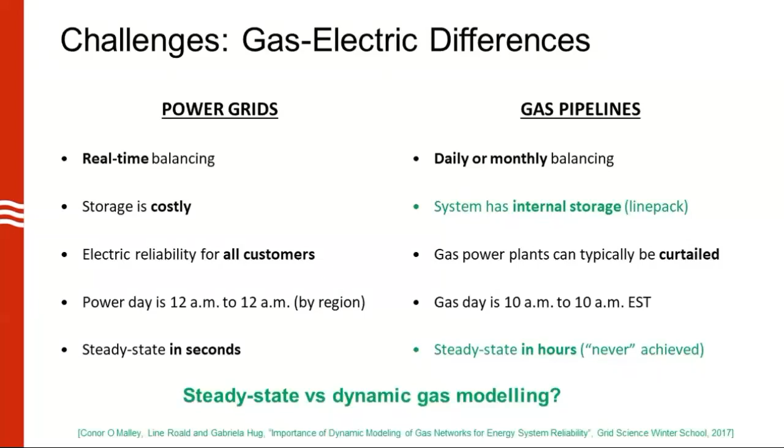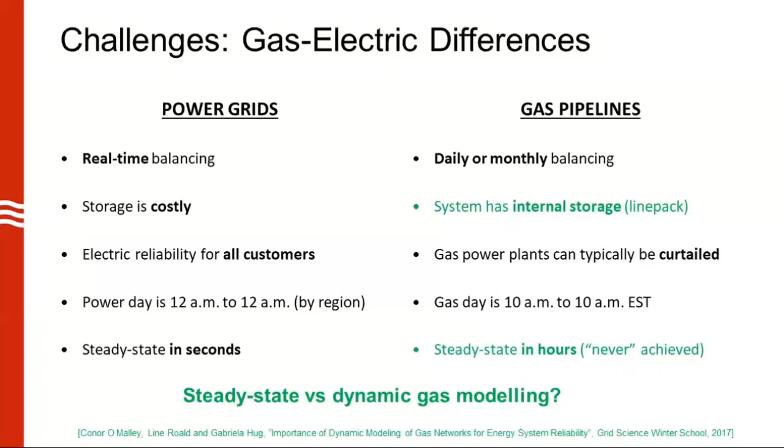The first thing I wanted to show you is how important it is that we're actually taking this dynamic modeling into account when we're modeling the gas system. So how important is it that we're looking at the dynamic model instead of a steady state model? I won't go into detail about these models, but the steady state gas system is essentially where you let the system run at its current inputs and outputs and see where it settles down. Whereas in the dynamic gas modeling, you're continuously accounting for how changes in the operational set points are going to change the operational conditions.

Here's a very tiny example. This is a 3-pipe system. We have a slack node at the top where the gas is coming in, and it's being withdrawn at node number 4 and number 3. In this simulation, we're starting from a steady state point, and then we're swapping the loads.

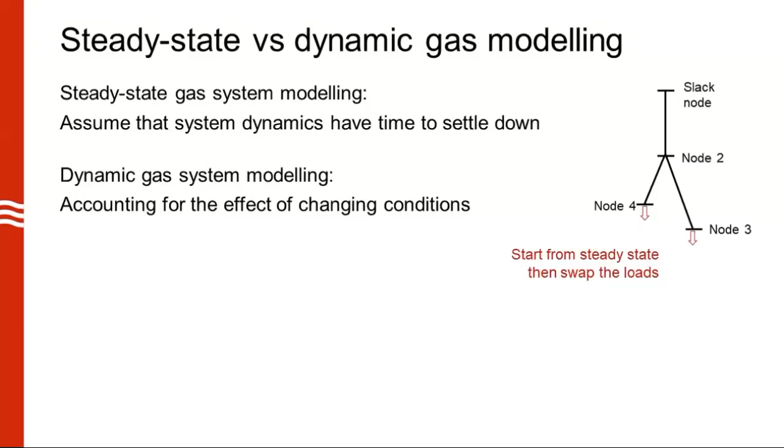What I've drawn here is the steady state solution and the dynamic solution. The dynamics is in blue, and the steady state is the black dashed line. This shows the pressure at node 3 as a percentage of the slack pressure over 10 hours. You see that after about 1 hour, we're swapping these loads, and the steady state immediately bounces to this higher pressure, whereas the dynamic modeling takes much longer to reach there.

The dynamic is the true representation of what's going on in the system. The system takes much, much longer than what the steady state is assuming for it to reach that new point. In particular, this takes more than 5 hours, and probably before those 5 hours are gone, we would already have switched to a new operating point.

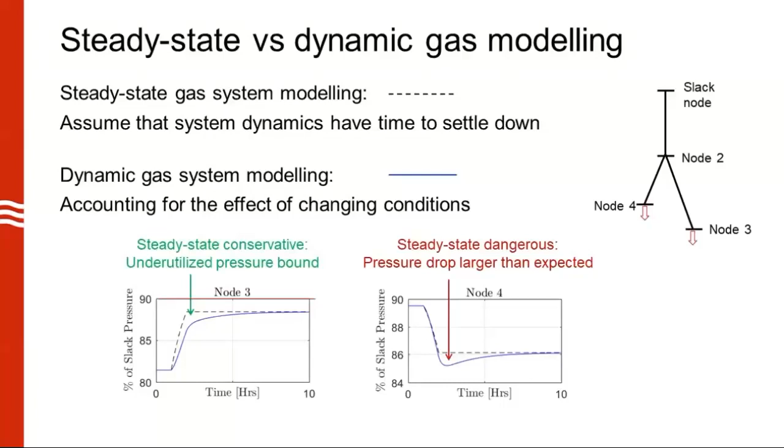The takeaway I want you to take from this is that it takes a very long time for the gas system to reach a new steady state operating point, and essentially it's never in steady state. If we choose to use just a steady state solution as an approximation of what the gas system is doing, we actually end up with solutions that can be really dangerous. There might be pressure drops that we're not seeing, or pressure drops that are larger than what we would expect. All of this can lead to problems.

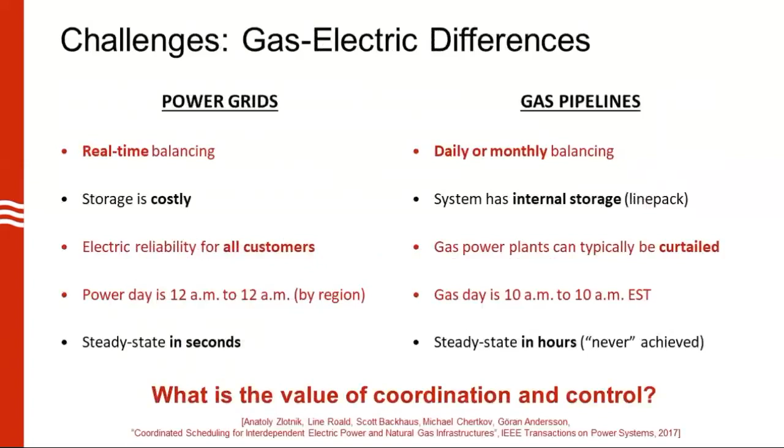So, rushing quickly into the last part, what I mentioned in the beginning is that we also have these questions of how we can coordinate the power grids and the gas pipelines better. What is the value of doing that coordination versus maybe just investing in better opportunities to control the gas pipelines? I'll go through this very quickly.

There are 4 operational scenarios here. The first scenario is essentially the operation today. In the graphic on the right, the x-axis shows gas operation that is more constant versus more dynamic, representing better control, and the y-axis shows the coordination. As we move from the corner, scenario 1, which is operation today, towards scenario 4, where we have both better gas operation and better coordination, we're investing more in information exchange between those entities, and we expect our problems to become computationally more challenging.

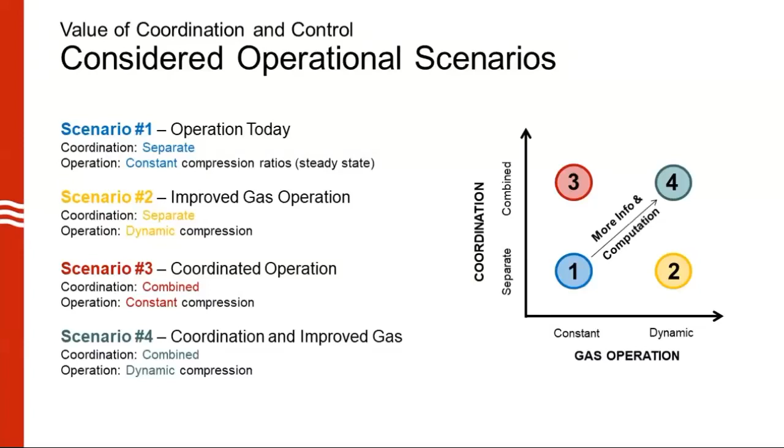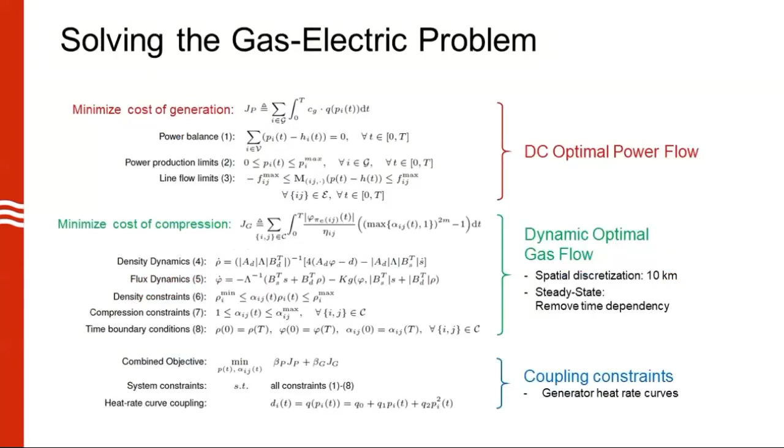I'll take you through those scenarios. Essentially what's happening here is that we're solving this big optimization problem where we're solving a DC optimal power flow, a dynamic optimal gas flow, and then we have the coupling constraints that represent how the gas power plants are withdrawing gas from the gas system. This is just a small test case to illustrate what can happen.

For today's scenario, the generation dispatch from the OPF is passed on in some form to the gas system operator. The gas system operator assumes the gas is withdrawn at a constant rate and might just run their compressors at a constant compression ratio throughout the day, because that's what they tend to do. Unfortunately, that leads to pressure violations.

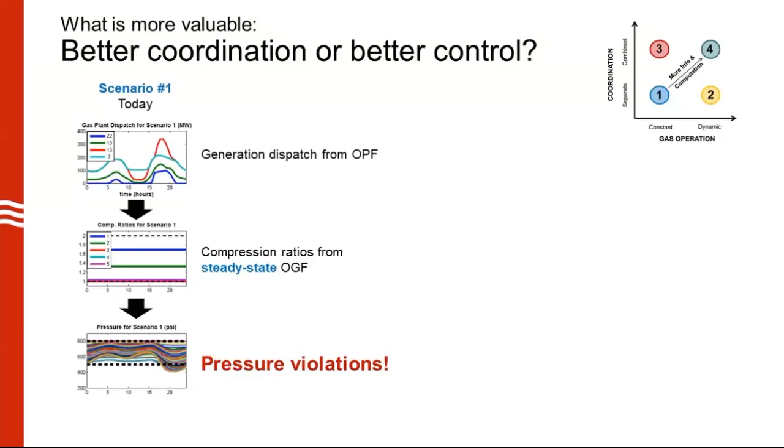If we invest in somewhat better control capabilities, we take the same dispatch from the optimal power flow, but now allow the gas system operators to operate their compressors in a better way. We see that it's possible for them to make sure the pressure stays within its bounds.

We also have a third scenario where we maintain the same kind of control—the compression ratios remain constant—but here we assume the gas and electricity system operators are talking to each other, and they make sure they can come up with a solution that respects the pressure bounds.

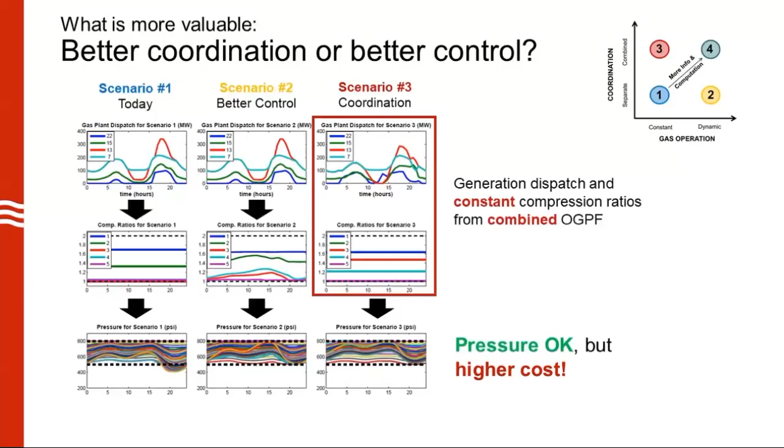Here we see that pressure is okay, but we get a higher cost. In our dream scenario, we can both operate the compressors dynamically and facilitate the solution from the optimal power flow. In this case, scenarios 2 and 4 are actually the same, so it was worthwhile to invest in better control, while better coordination wasn't really important.

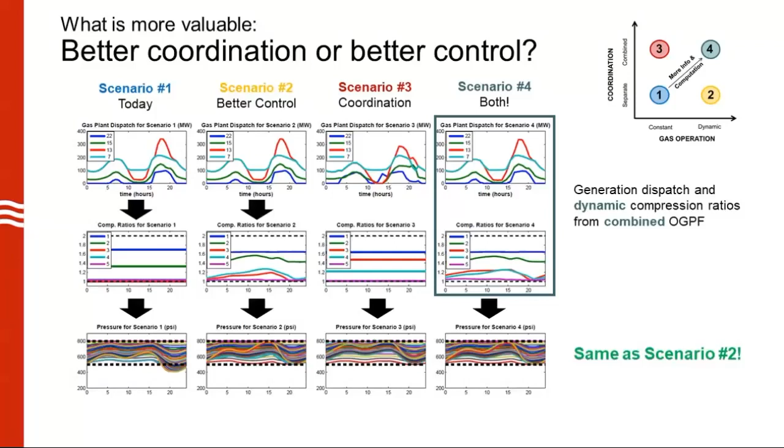But if we go to a higher loading scenario, things change. Without any coordination, the problem actually becomes infeasible. Whereas with coordination, we get much lower costs if we invest in both better coordination and better control.

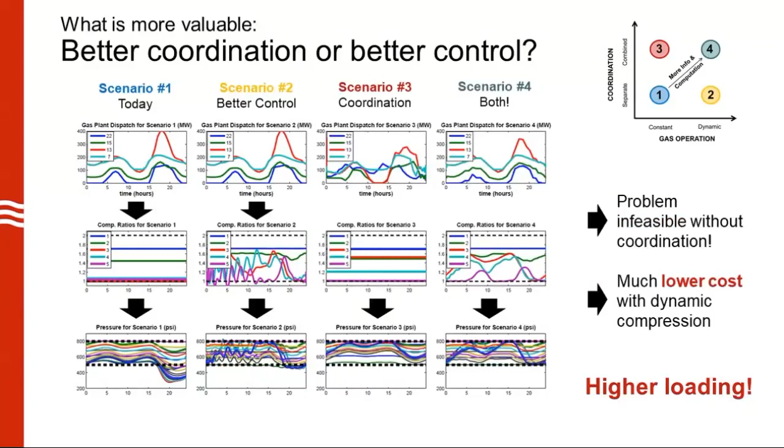I know this is going fast, but I wanted to get to the end. The summary: it's really important to account for gas system dynamics when analyzing gas system operations, because otherwise it can lead to dangerous solutions. The operation of gas-electric infrastructures can be improved through better control and better coordination, and which of those is best to invest in depends on the loading scenario. In a low to medium load case, better control may be sufficient, as we saw in our test case. But in a high loading case, you might need both improved coordination and better control.